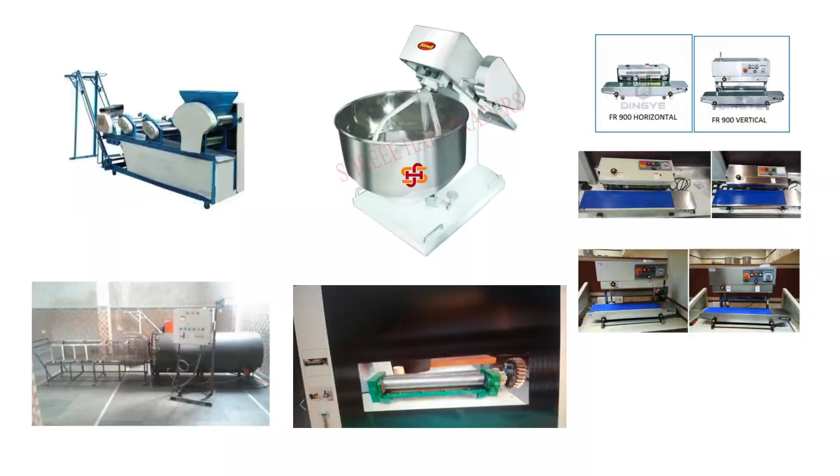Hello friends, by the end of this video, you will know exactly which machines to buy for setting up a millet noodles business factory and, more importantly, how to upgrade your factory when you want to expand your business. This video is a must-watch for anyone looking to set up a millet noodles business.

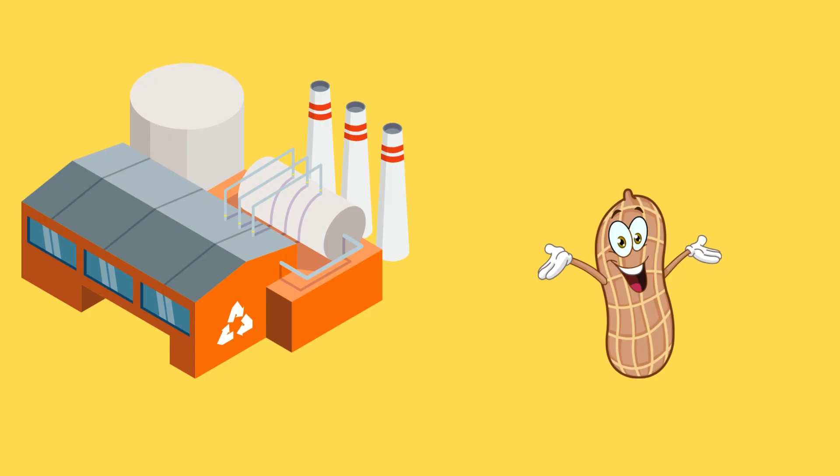When starting a small-sized millet noodles business, it's best to have a factory that can produce 130 kgs millet noodles per day. If you start with less, you'll likely need to upgrade your machines within 6 to 12 months. When starting a medium-sized millet noodles business, it's best to have a factory that can produce 200 kgs millet noodles per day. Starting with more can lead to unused capacity for a long time.

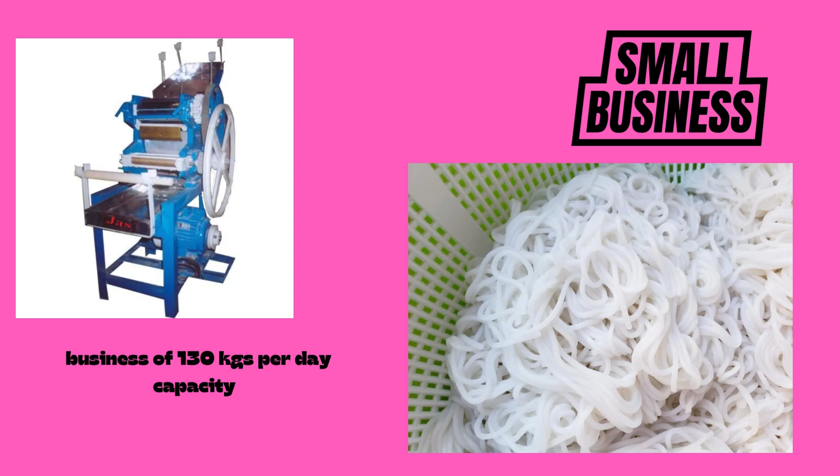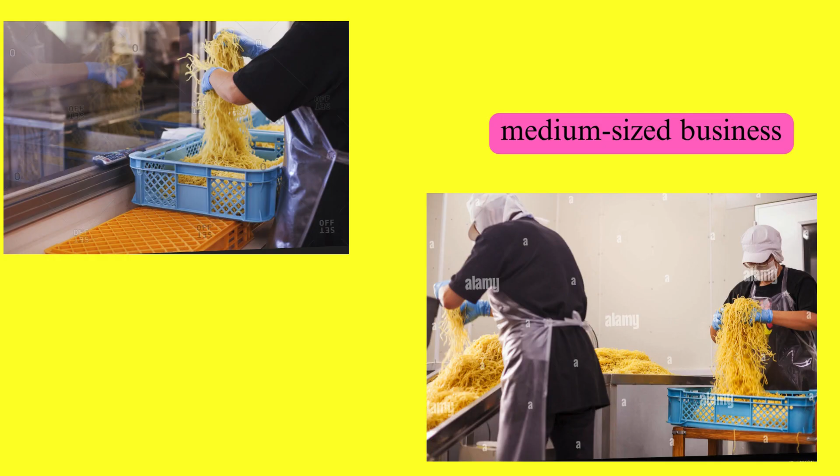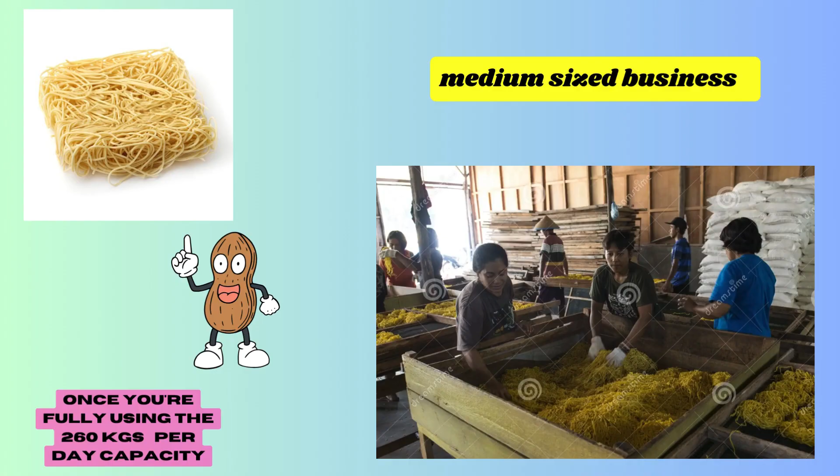When starting for the first time, begin with a small-sized business of 130 kgs per day capacity for an 8-hour workday. Later, as your business grows, you have two options. If a 16-hour workday is not possible, upgrade directly to a medium-sized business of 200 kgs per day after 2 to 3 years. If you can work 16 hours, first increase to 260 kgs per day by working 2 shifts a day once you're fully using the 260 kgs per day capacity, and then consider upgrading to a medium-sized business of 260 kgs per day.

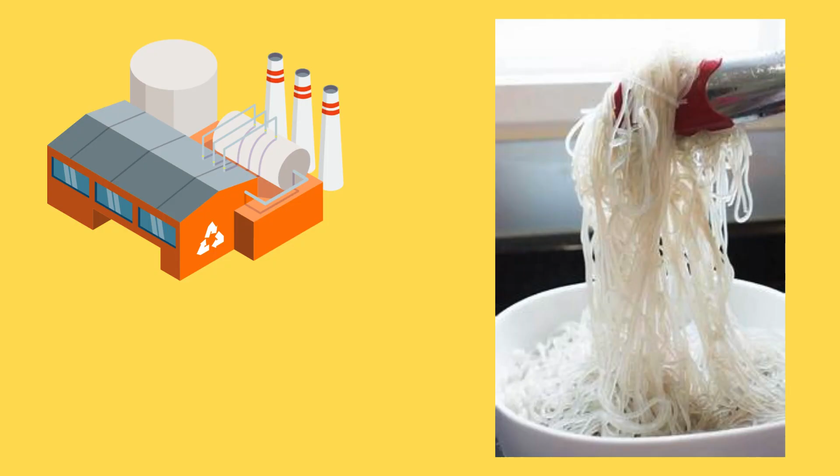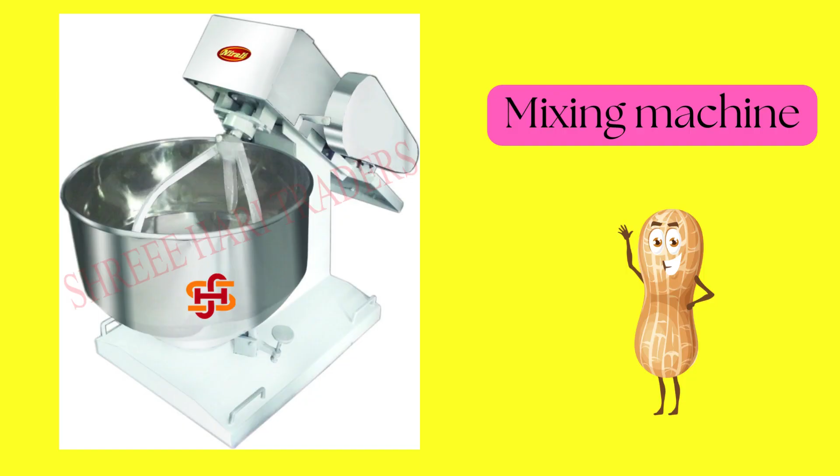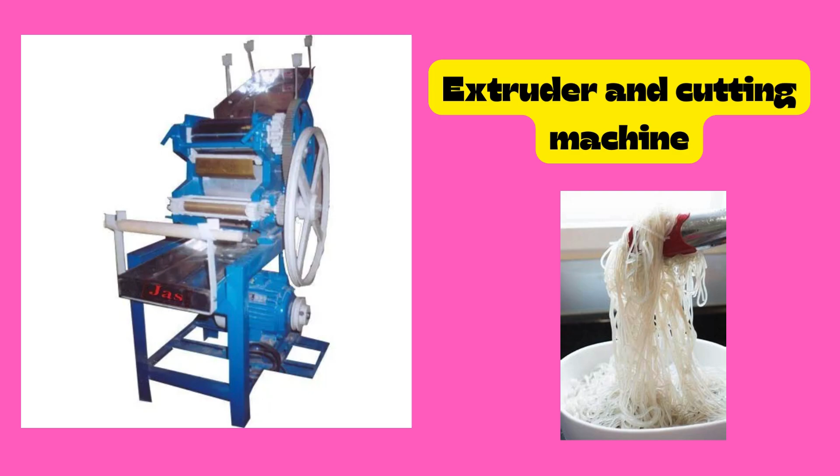Now, let's delve deeper into the exact machines you need. We will first talk about small-sized businesses. When starting a millet noodles small-sized business with a factory capacity of 130 kgs per day, you'll need several types of machinery. For processing, you will need a mixing machine for mixing ingredients for noodles dough. Aim for a capacity of 100 kgs per hour machine costing around 45,000 rupees. Then you will need an extruder and cutting machine part to cut noodles into desired length, ideally with a capacity of 50 kgs per hour, which should cost around 95,000 rupees.

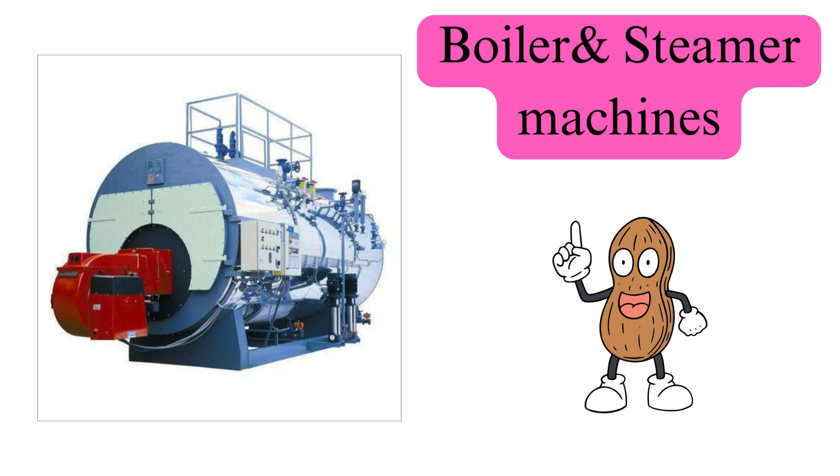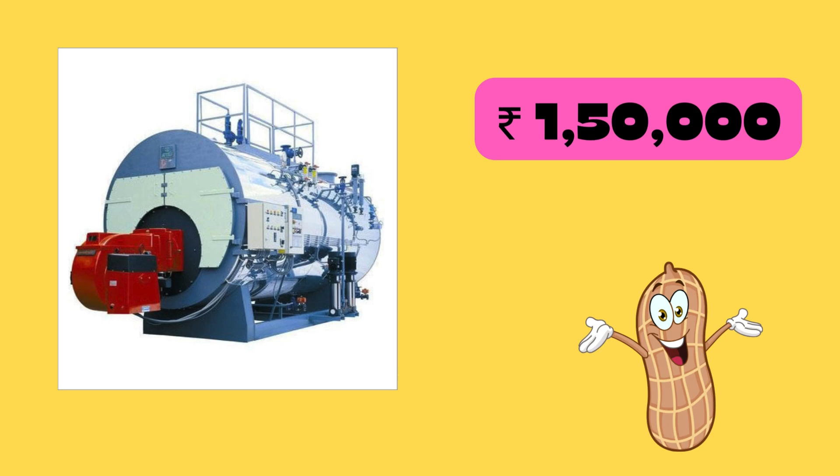Additionally, you should have a boiler and steamer machine to partially cook noodles through steaming. The capacity of a boiler and steamer machine should be 50 kgs per hour, costing around 1,50,000. Then you will need a wood heating box to remove moisture from noodles for preservation. The capacity of a wood heating box should be 200 kgs per day, costing around 2,40,000 rupees. You will also need a weighing machine. It is useful for weighing millet noodles grams wise. A weighing machine costs around 5,000 rupees.

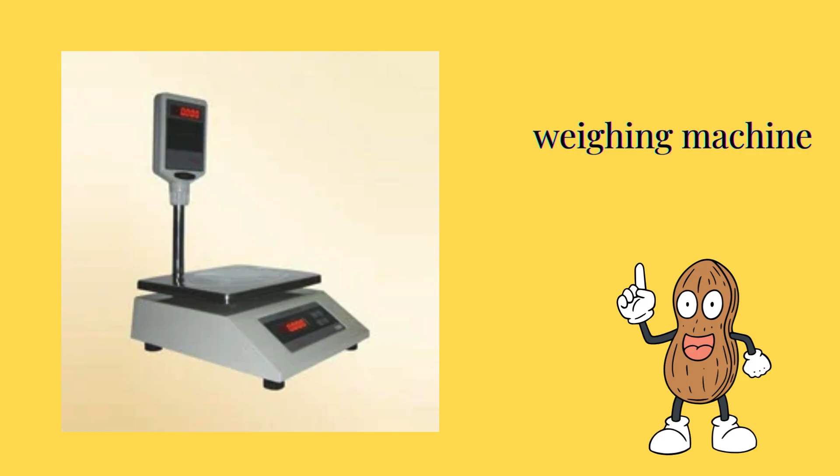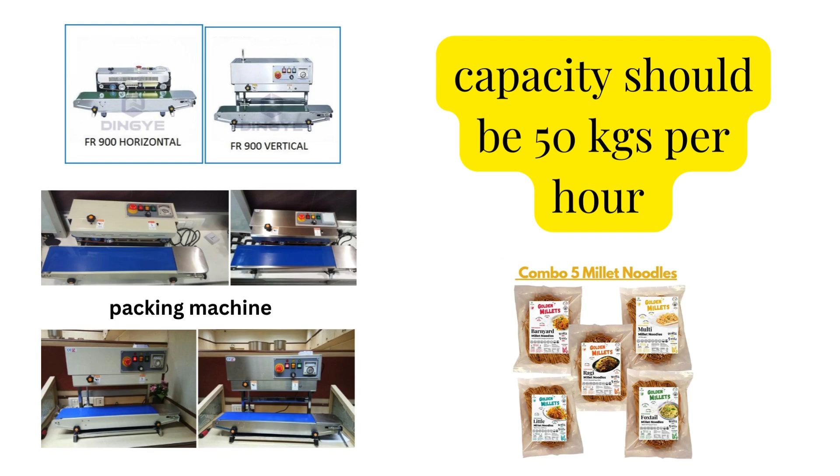Then a packing machine is required for packaging noodles, sealing, labeling, etc. The capacity should be 50 kgs per hour, costing around 40,000 rupees. Finally, you'll need gas cylinders and steel items for millet noodles preparing, which will cost about 5,000 rupees.

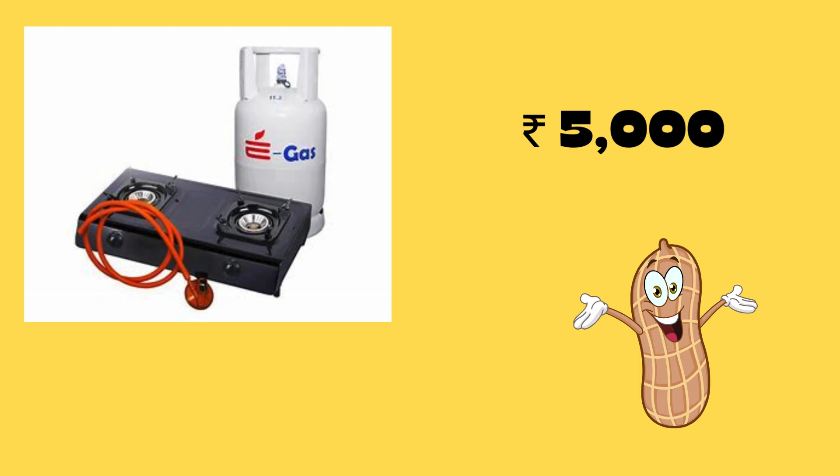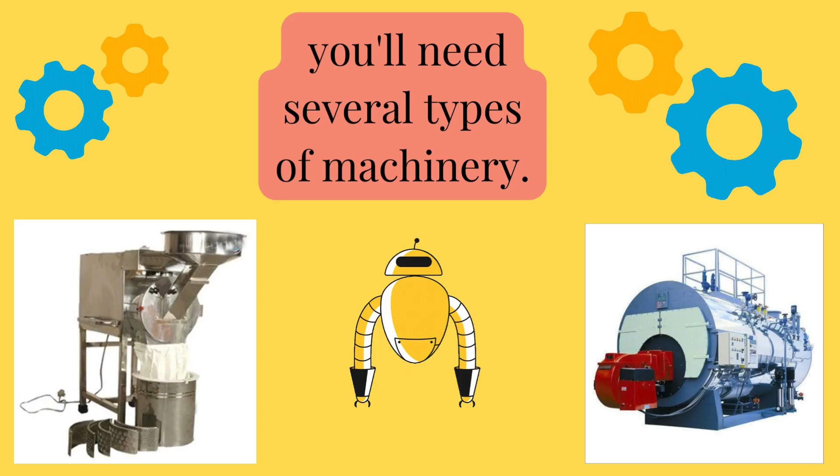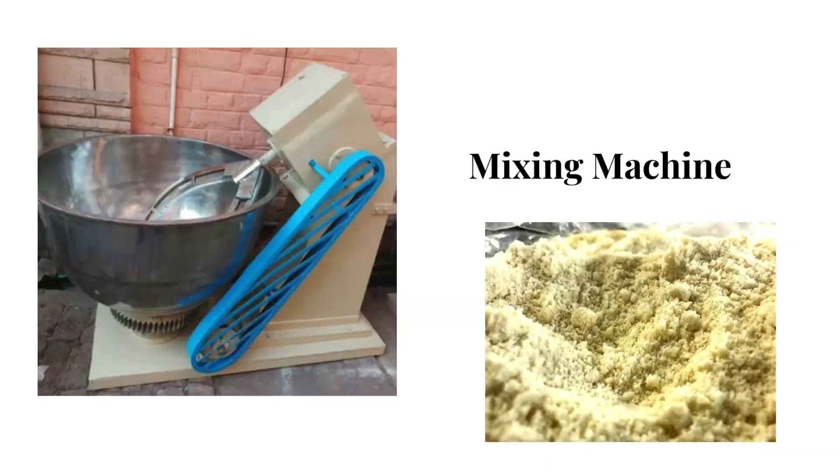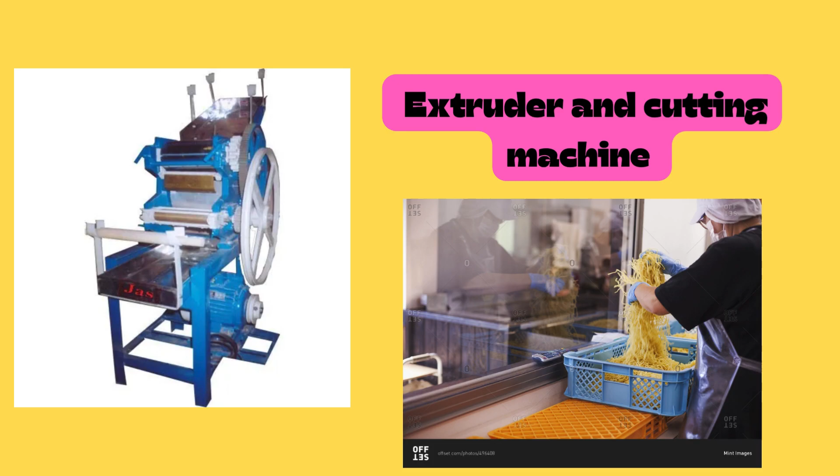Now, we will talk about medium-sized businesses. When starting a millet noodles medium-sized business with a factory capacity of 200 kgs per day, you'll need several types of machinery. For processing, you will need a flour mill for mixing ingredients for noodles dough. Aim for a capacity of 200 kgs per hour machine costing around 30,000 rupees. For processing, you will need a mixing machine for mixing ingredients for noodles dough, with a capacity of 100 kgs per hour, costing around 1 lakh rupees. Then you will need an extruder and cutting machine part to cut noodles into desired length, ideally with a capacity of 50 kgs per hour, which should cost around 95,000 rupees.

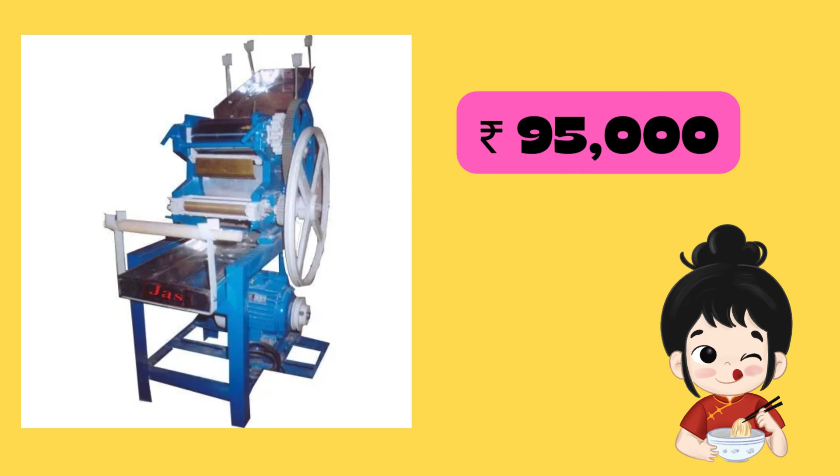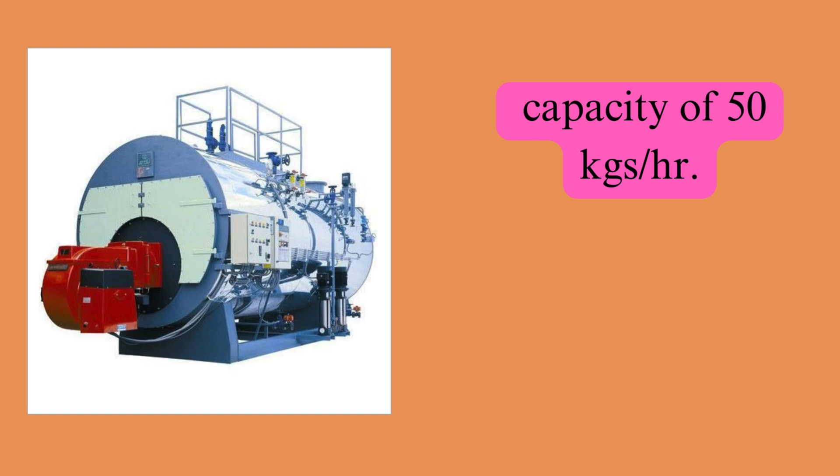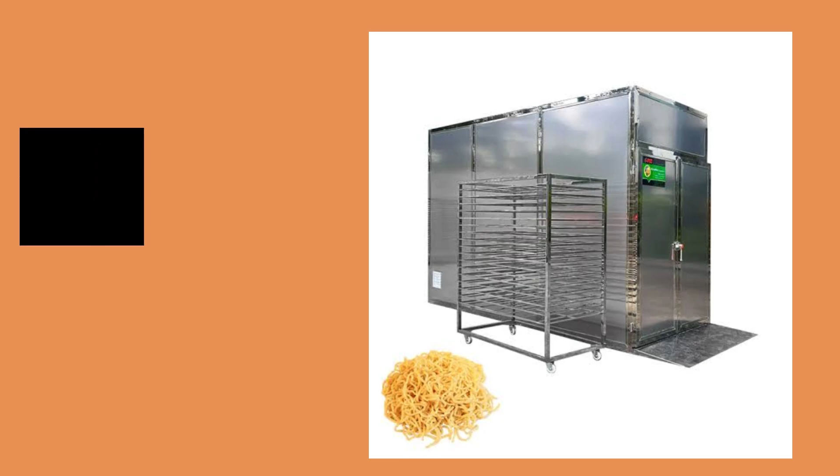Additionally, you should have a boiler and steamer machine to partially cook noodles through steaming. The capacity of a boiler and steamer machine should be 50 kgs per hour, costing around 1,50,000 rupees. Then you will need a wood heating machine and boxes to remove moisture from noodles for preservation. The capacity of a wood heating box should be 300 kgs per day, costing around 5 lakh rupees. You will also need a weighing machine. It is useful for weighing millet noodles grams wise. A weighing machine costs around 10,000 rupees.

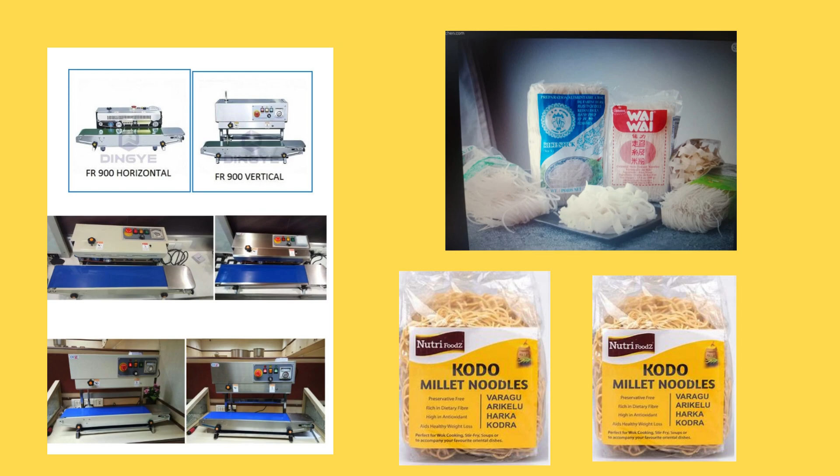Then a packing machine is required for packaging noodles, sealing, labeling, etc. The capacity should be 50 kgs per hour, costing around 40,000 rupees. Finally, you'll need gas cylinders and steel items for millet noodles preparing, which will cost about 7,200 rupees. Please note that all these machines can be used to make all kinds of millet noodles.